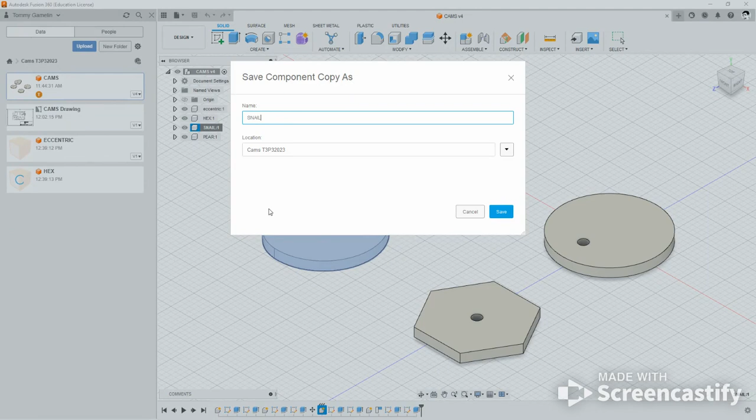It's my eccentric cam. Save copy as hex. Snail - I'm retitling them because I don't want 'cams' in front of them. And pear.

So now that I have these in my data panel, I can go into each of them individually and change the holes to 1/4 inch diameter instead of the 3/16 that we made for the previous assignment.

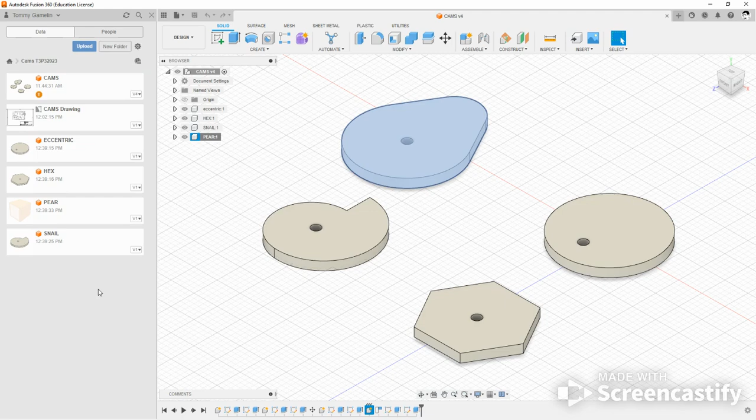Next thing I'm going to do is start a new design. Rule number 1, title it. Save and title - this is going to be basic automata.

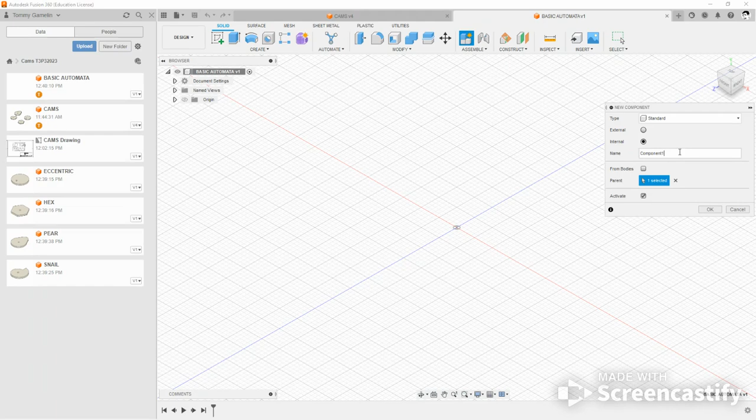Rule number 1 is share or save. Rule number 2 is new component. This new component is going to be my box.

This is the box that we're creating. It's 4 by 4 by 5. The dimensions are also up on the board.

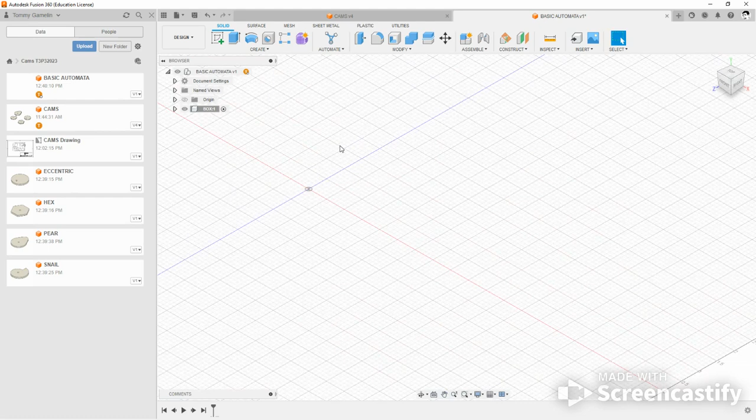So the video, he does it a little bit longer - he actually takes the separate pieces of the box and puts them together. I'm just going to draw the box as a whole because it's faster. We don't like to waste time.

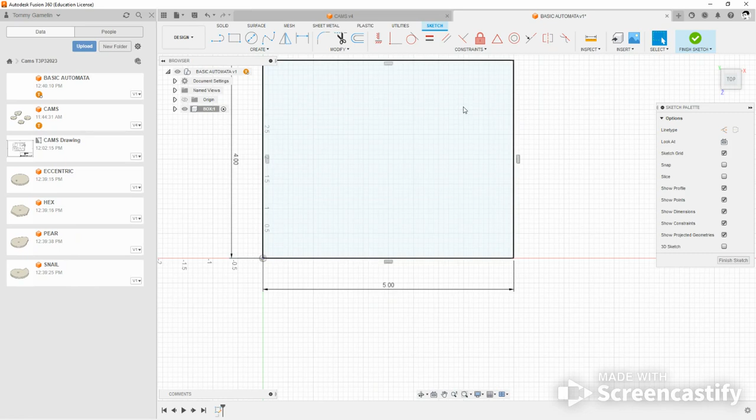So in the new sketch, I'm going to make a rectangle, and that rectangle is going to be 5 on this side, and then 4 on this side. Finish the sketch. I'm going to extrude this because it's 4 by 4 by 5, going this direction - I'll type 4. So it's a 4 by 4 by 5 box.

I need to have a cutout here, and the cutout is like this. The MDF is 1/4 inch, so I want to have 1/4 inch on all 4 sides, just copied. So I'm going to use a tool called offset.

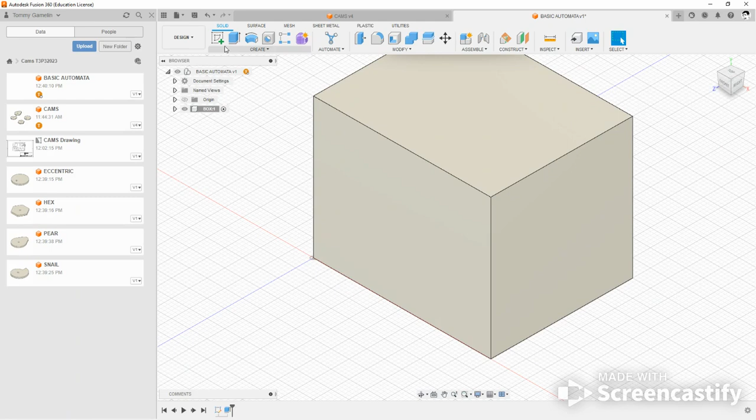So I'm going to go to a new sketch, and put it on this side of the box. I'm going to click on the side of the box and choose offset. Offset will copy a group of lines - notice how when I hover over this group of lines, it highlights green or blue.

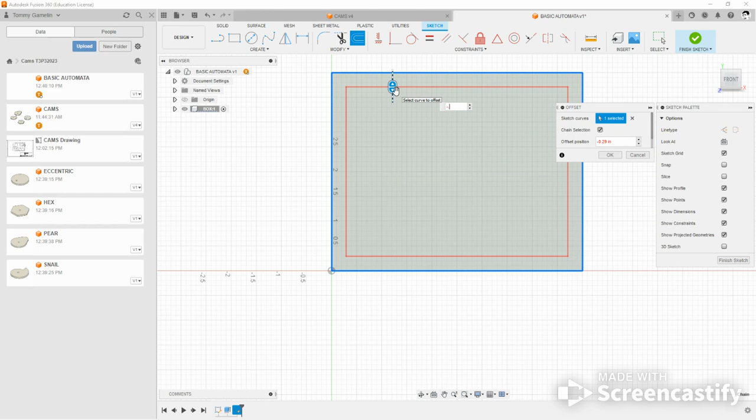I'm going to go inside. When you offset, it's going to copy - you can choose to go inside or outside of the object you're copying, but it's got to be closed geometry. I'm going to go inside, so that's going to be negative 0.25. You could put 1/4 as well if you want.

So we copied this group of lines. I'm going to finish that sketch, and extrude it, starting going into the box. Since I know the box is 4 inches in total depth, I don't want to go all the way through.

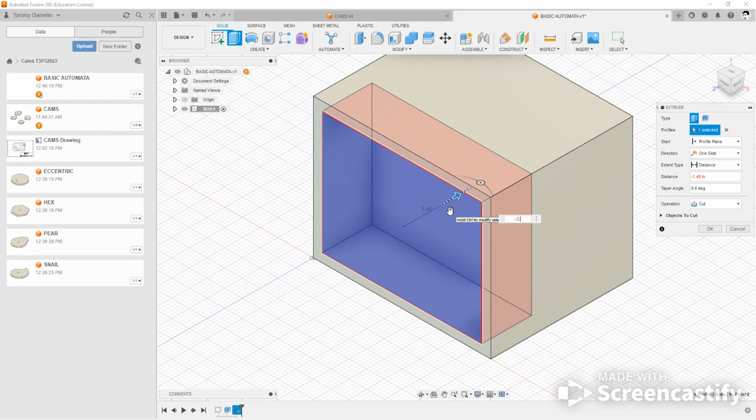This example goes all the way through like that, but for this example I'm going to keep the back closed, and say negative 3.75, so it leaves 0.25 on the other end of the box. It looks like this.

Okay, now I need to put a hole on the side that goes all the way through, a hole on both sides, and 4 holes on the top. I'm going to do it the fast way.

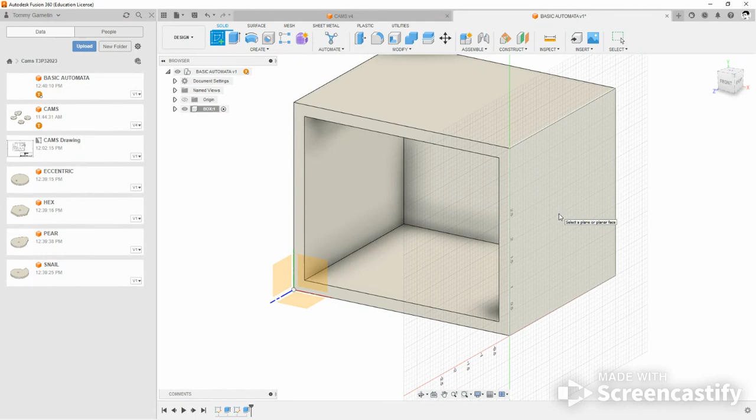So I'm going to do a new sketch on the side here. Notice I'm picking on the box, not on these planes anymore. I only pick those planes if I've got nothing in my drawing area - 90% of the time I'm going to select on an object. So I'm going to select on the side here, I need to put a hole.

Now this hole needs to be exactly in the middle. So I want to make sure that hole's in the middle. Here's the trick to doing something exactly in the middle without getting mixed up with a bunch of dimensions: just draw from corner to corner, and where those lines converge, that's the center.

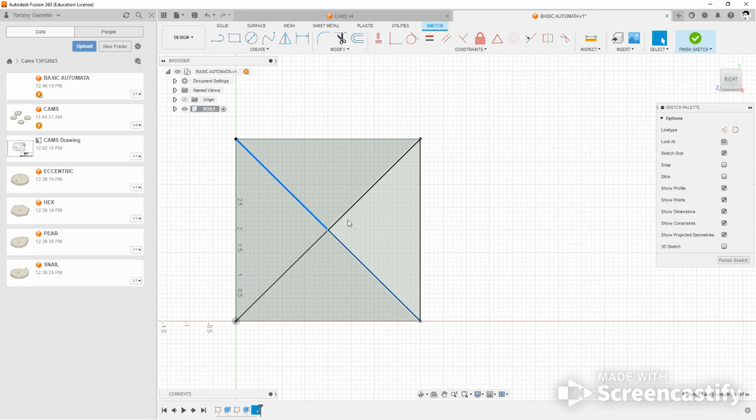I'm going to press escape and reselect these lines. Reselect that one, I shifted and selected this one, so I selected all these lines. I'm going to right click on the lines and choose construction.

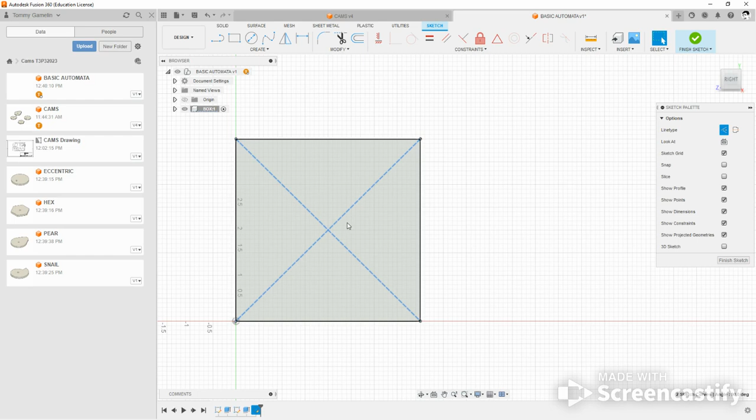So there's normal and construction lines. Normal lines are going to behave like normal - we've been working with normal lines for a while now. Construction lines are only for sketches, and they're not going to act like objects, they're just there for reference. So I know that this is the center. These construction lines will not carry over after I end my sketch.

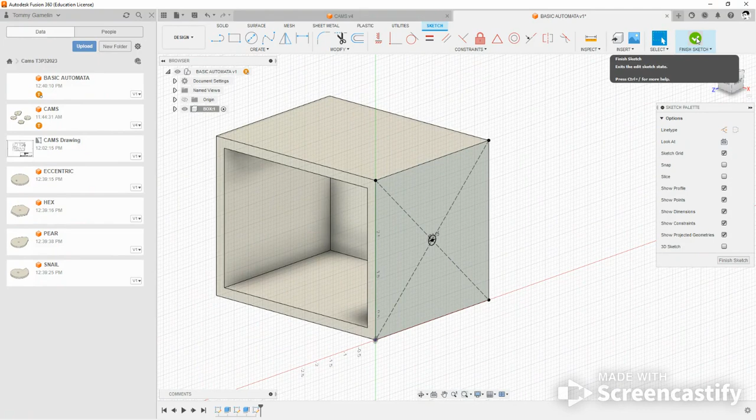So I want to put my circle right in the middle here where these two lines converge. 0.25 - remember I said everything's going to be 0.25, or 1 over 4, for this box. Now I know that's exactly in the middle there. I was trying to snap onto another middle point. I don't want it on that middle point, I want it on that X.

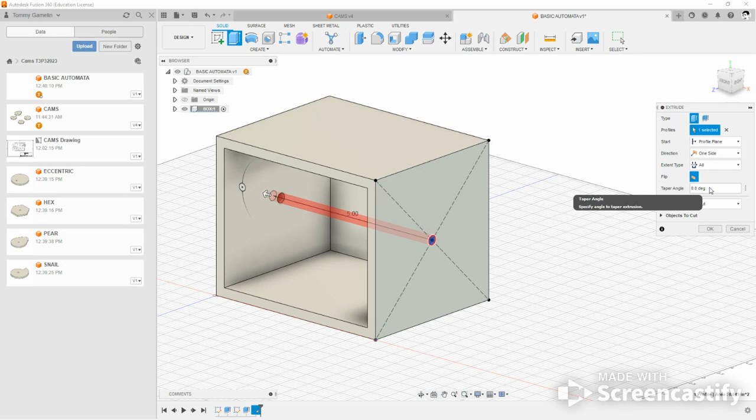Okay, I'm going to extrude that. I'm going to start going this direction, and I'm going to choose all. This is important, because if I change the size of the box, decide my automata is going to be bigger, that hole's always going to go through, and it's going to go through exactly in the middle. So, okay, I've got my two holes on the side here.

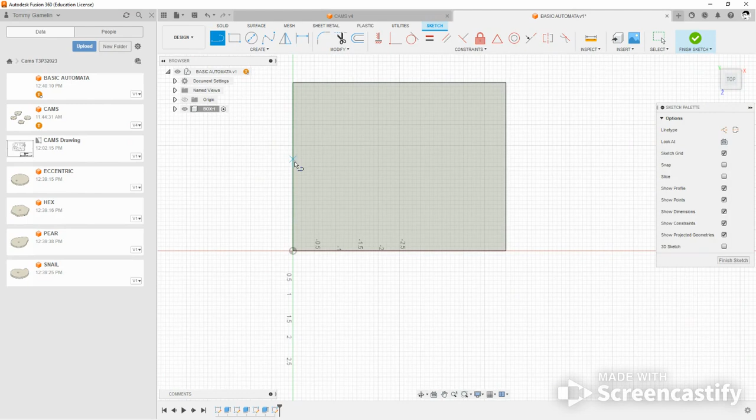Okay, now I need to put 4 holes on the top. A few different ways to do this, but I'm going to do it the fast way, of course. So let's select the top of the box here. I'm going to draw a line right down the middle, using the middle snap point for that.

Make sure that is lined up there. Yes, it's snapped to the middle, just want to make sure. Click top again, let's turn this around.

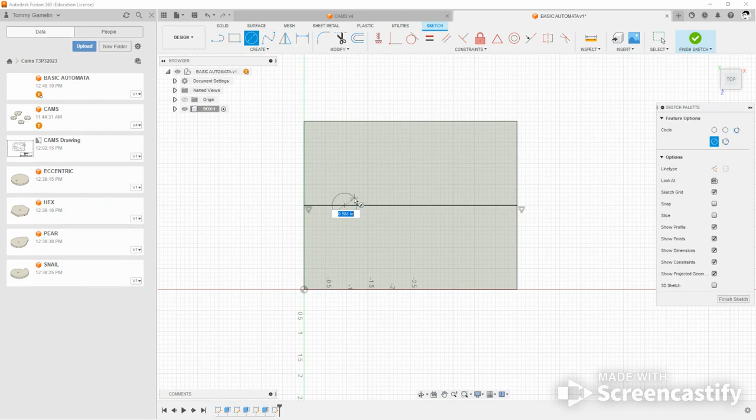Okay, circle number 1. Now I'm just going to drop these circles in first - 0.25 circles. I'm not going to measure them or anything, I'm just going to do 0.25 circles. I'm going to make sure that they're decently spaced,

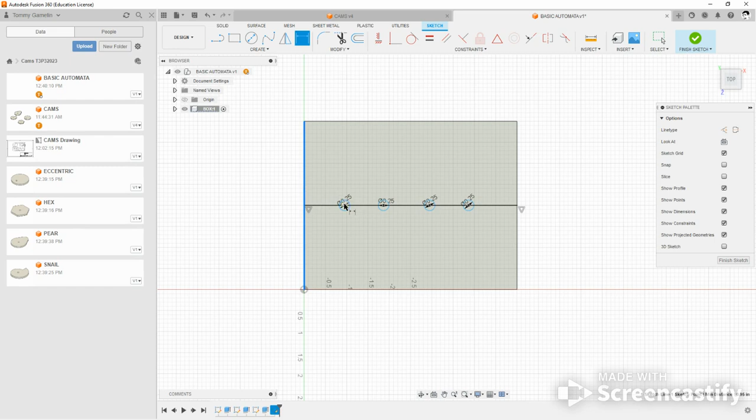because I'm going to go back with dimension and make sure they're exactly spaced. So D for dimension, I'm going to click the end here and the middle of the circle, make sure that's 1. Okay, dimension middle of the circle. 1. Middle of the circle, middle of the circle, 1, middle of the circle, middle of the circle, 1.

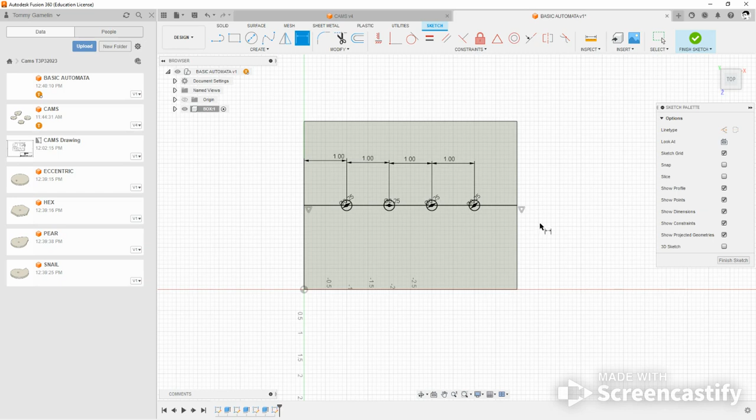Finish the sketch, go to extrude. Once again, just go - you know what, see, this is what happens if you don't make your construction lines. That middle line, I accidentally left it as a regular line. So let's go back and make it a construction line.

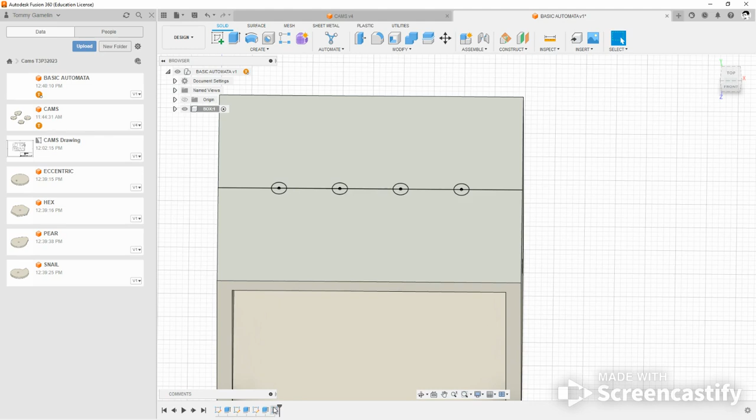How do I do that? I right click and I say edit sketch. Okay, so this line right here, we want to make sure that is a construction line. Okay, let's finish this sketch now.

And it should behave better. Okay, there we go, 1, 2. See, it's not selecting half the top there. So that's the difference between a construction line and a regular line in real time.

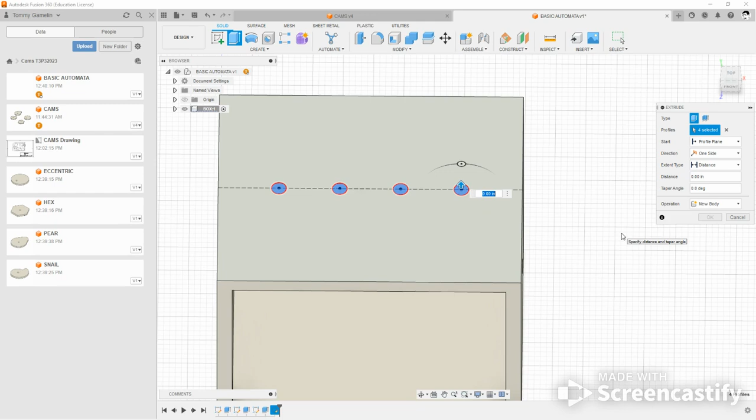Going to go this way. Now, with this, I don't want it to go all the way through, because then it's going to go through the bottom here - don't want it to go through the bottom there. I just want it to go through the top. So instead of distance, I'm going to choose 'to object.' I'll click the bottom of this. That's going to go all the way through, it's going to cut.